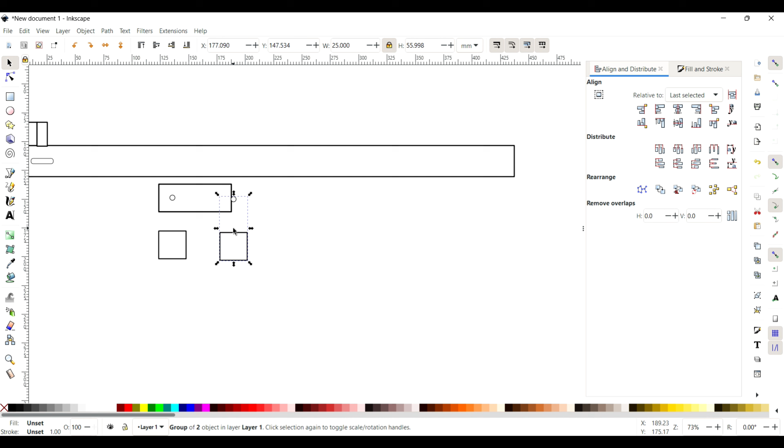And then I'll just copy both of those, Control C, and Control V to paste it back in, and align it to the right hand side there. Now that I've done that, I can just delete those two squares because I don't need them anymore.

So now I've got to centre align these, nice and easy again. You just select all three items and then press the centre align button.

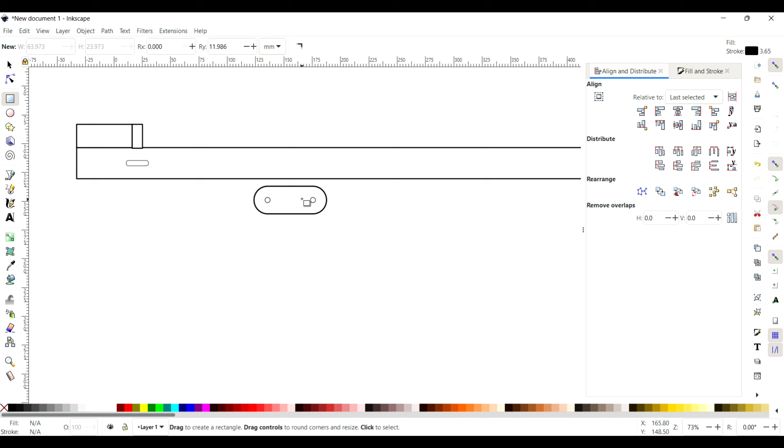Now here's where I can curve this one in, just like that, and then that'll eventually get stitched on top of the main belt of the collar, or the main collar.

So now I'm making another guide box, and this is just to allow for the width of the D-ring in the middle there. This is where I decided I was going to put two rivets on each side of this bit, just so it's nice and secure.

You don't want this popping off and your dog escaping and chasing some wee granny down the road. So I'm just eyeballing everything here. I know rough sizes of how big my rivets are, so I'm basically doing it by eye.

So having spent that time sorting them out, I actually realised that I didn't correct the size of the holes for the pop rivets, so I'm going to do that on this one. I believe that they're 3mm, and that's what I changed it to, just here, using that box up the top.

And then you have to ungroup them, and I move them apart, separating them, spacing them out so they look decent, and allowing for the head of the rivet so it's got space either side, not to interfere with the D-ring that's going to be underneath that.

So now that I'm happy with that, I'll just copy those two and paste them onto the other side, and then centre align everything and make sure everything looks brilliant. So I'll tweak finally, and then we can get that pasted across. So that's that bit roughly done.

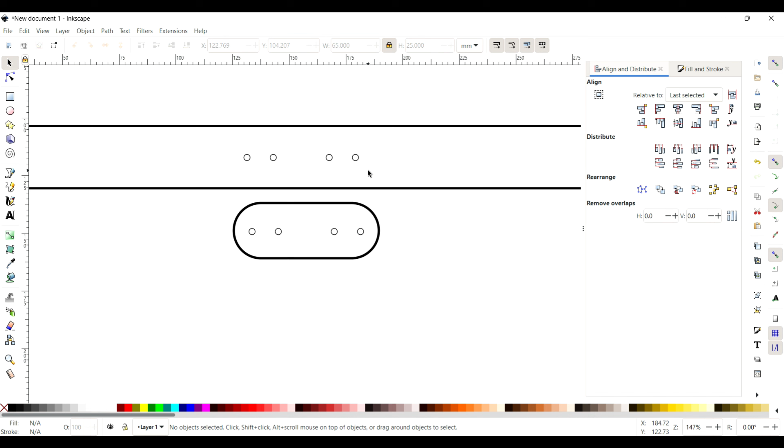So we're selecting this now and then just dragging it up, positioning it roughly where it'll go, and then copying it and pasting it below, and then getting rid of the border, because all we need on the actual belt itself is the holes, so we can line it up later in the job.

So now I've drawn another few boxes there, and what I'm doing is I'm just copying the same holes from before, making more rivet holes for either side of that buckle. I'm wanting 4 here, so I'm just again copy and pasting. It's a way forward, it saves you having to redraw everything, and then using your align tools, it's so handy.

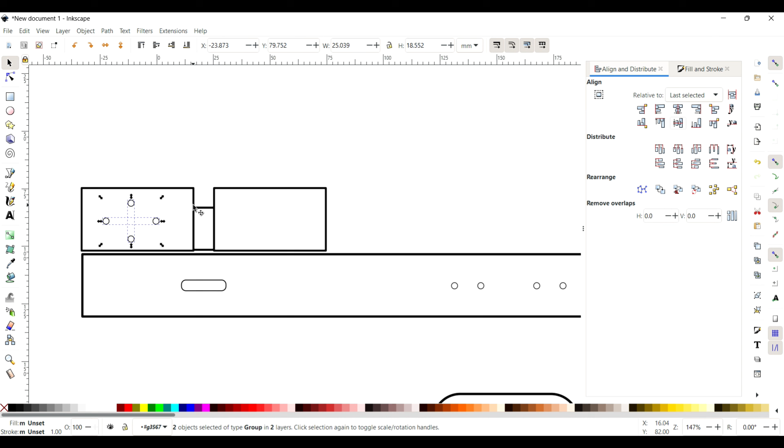So you'll see me doing a lot of tweaking here. I do a lot off the top of my head, so nothing is measured massively, roughly. I measure stuff and then I just play around in the actual app itself, or Inkscape should I say.

So what I've done is I've drawn a box 10mm wide there, just to help with aligning those 4 rivet holes, and then what I'll do is I'll copy it all once I've aligned it all.

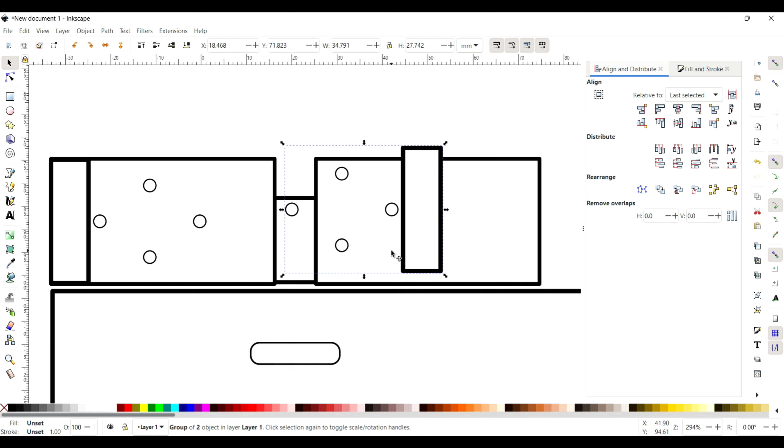Now that I've copied it, I can just go ahead and paste it onto the other side. You can see it went behind the object there, so I just press page up and that brings it up to the front of the layer. And then again, it's just a case of using those align tools to your advantage and lining everything up.

So again, I can get rid of those guide squares, group both of those sets of rivet holes and align them off the centre of the hole for the buckle there, and then delete those guides because we don't need them anymore.

Now we can work on getting some buckle holes for the, I don't know what you call it, the little prong that goes through the buckle.

So for this, what I'm going to do is draw a series of straight lines, just so that it's easier for me to measure to the precise point I know for the dog it was designed for, where it needs to be, basically the hole they use in their current leash collar.

So that line that I've just drawn horizontally needs to be 33 centimeters, or 330mm, and then I can just left align them to that other line that I've lined up with the centre of the buckle hole.

So now that I've got that in place, I can start drawing out my holes for the prong on that buckle, like a normal sort of collar belt would be.

So again, I'm just drawing a rough circle and then resizing it down to 4mm, which will be perfectly big enough for the prong, and then I can right align it to the end of that line, and that's roughly in the position where it needs to be.

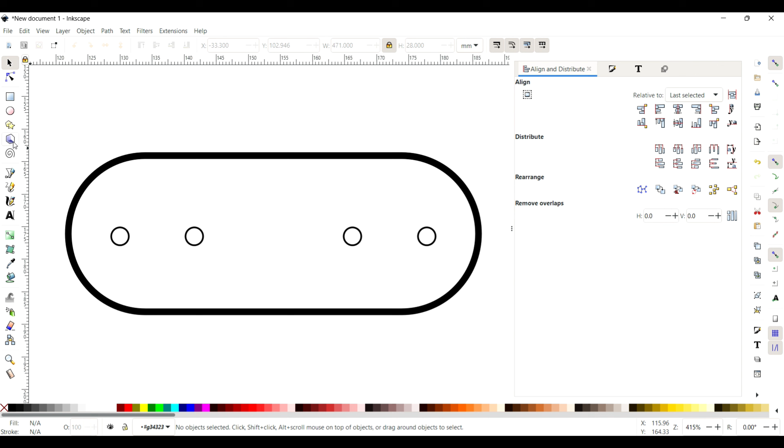I chose to personalise this with a nice big name. I played around with different options, but this is probably the best bit. Again, you just go do what you feel, basically. This is all just an experiment to see how good the laser does with leather.

So now what I'm going to do is add stitching holes, because I thought, as well as the rivets, we should add some stitching holes. It's quite easily done, and there's tools within Inkscape to make it easier. Originally I was going to do circle holes, but I decided to go against that.

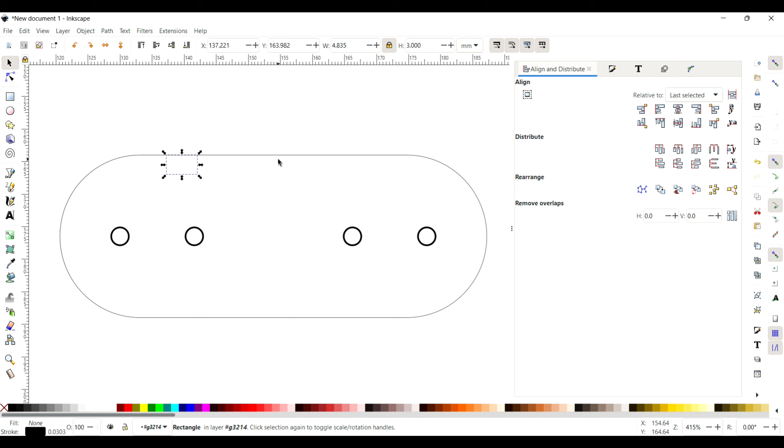So what I'm doing just now is creating another guide box which is going to be 3mm high, because I want to create an offset of 3mm on the inside of that box, and that's the easiest way to do it. You just go to linked offset and drag that line down, and you can see it's 3mm on the inside. Now that I've done that, I can delete the box and convert the inner line, the offset, into a path. So I draw out my wee circle, but later I decide to change it to an oval at a slight angle.

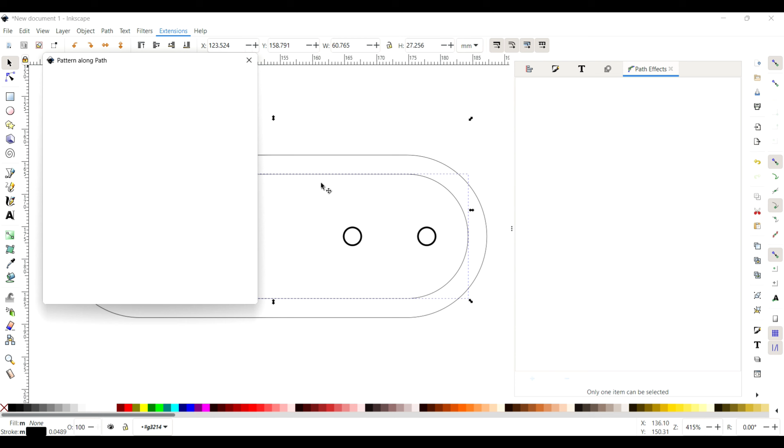There's the oval now, and then we can go to extensions, generate from path, and then pattern along path. It's quite a handy wee tool, there's loads you can do, but I just need its basic features, which I forgot to turn on initially. The pattern isn't vertical, that's why it doesn't look quite right, but then I go through the settings, changing the width of the stitch down to like 3mm, and eventually click that pattern is vertical, and we get what you can see here.

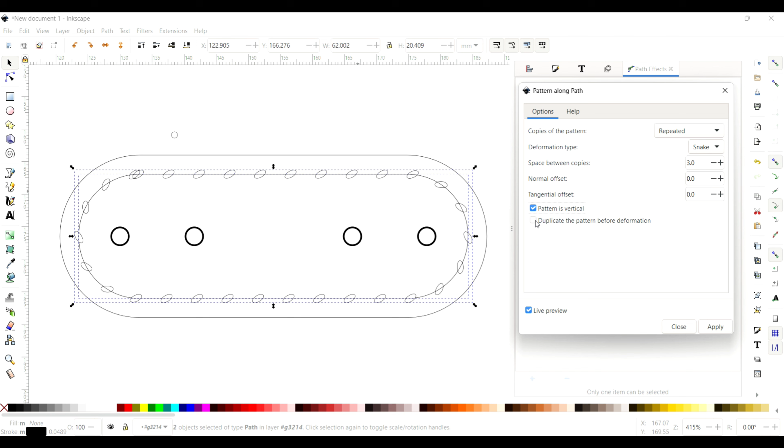Yes, I've got an overlapped one, but that's fine. Once you've played about in this box, you can just hit apply, as long as you're happy with how it looks. I'm fairly happy, I know I can edit that little oval, so we'll hit apply, and then we need to select them, ungroup, select one of them, delete it, and move that one across just a fraction so it evens out that last stitch there.

Now that we've done that, I want to put vertical stitches either side of where the D-ring will sit. So I'm just copying 4 of the ovals so they're the same gap and same distance. Then we'll delete the middle 2, top and bottom, just by drawing a box round and hitting delete on the keyboard. So now we select the 4 again, group them, rotate them and flip them so that eyelets are pointing in the same direction as everything else, and roughly place that in place.

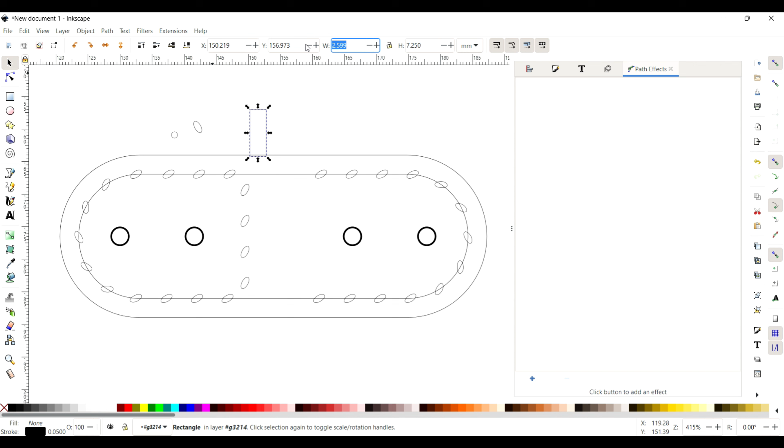I've spent far too long trying to get it bang on, and then decided to draw another guide box at 7mm wide, I believe. Yep, I drew it at 7mm. See, I'm doing this off memory, and my memory is shocking, so I'm actually nailing it here.

I always get a wee bit confused with the next tool that I'm going to use, but we'll figure that out. So I'm just copying and pasting another setting, and for this one I'm using those little corner reference points. Again, I always confuse which one I need to press, but I'll get there eventually. Then you see it will snap across onto the other side, and again it's just a case of selecting that and the outer ring, and hitting that middle align button.

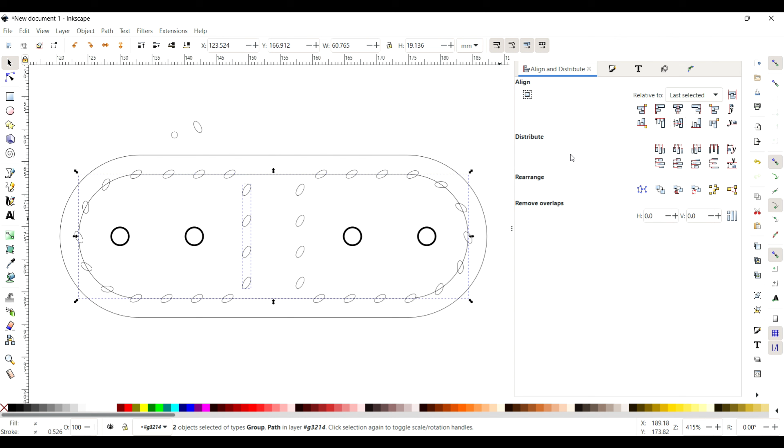With this one, a wee bit easier. I remembered which one to get, and again just center it all up, delete that middle box because we don't need that anymore. So now that I've done that, I can just go ahead and align everything and get rid of that line because we don't need it anymore.

That's just a guide for our stitch holes. Then I'll select it all and place it on, so now that's all done you can see the general feel of the whole thing. To make it easier in Lightburn, I'm going to separate the engraving job from the cutting job, which makes selecting in Lightburn so much easier.

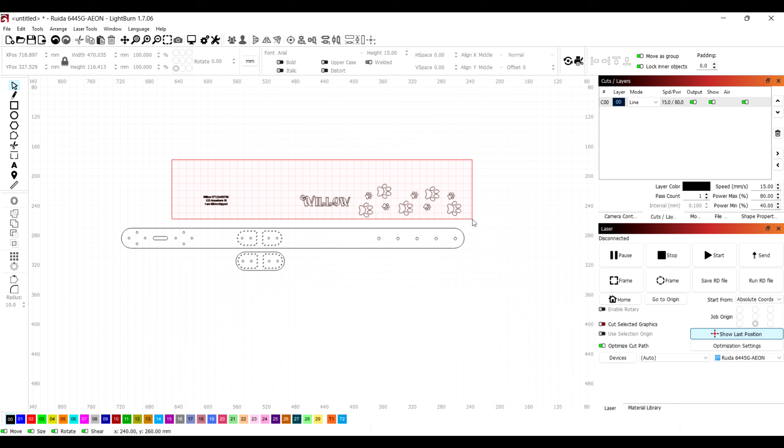Now it's just a case of copying and pasting it all over into Lightburn, like you can see here. The settings for how I engrave and cut will come up when I'm filming that section, which is very soon. So to save a little time, here's a wee tip for everybody.

If you've got a big gap like I have between the address and the paw prints and stuff, you can change it to different colours and keep the same settings, but it means it runs at a different time. So here I'm changing the address to red, I believe. Once I've ungrouped it, just select it again, go down and pick another job. Remember to reorder it though - have your engraving jobs before your cut jobs, otherwise when you cut it the whole thing could move and then it's ruined.

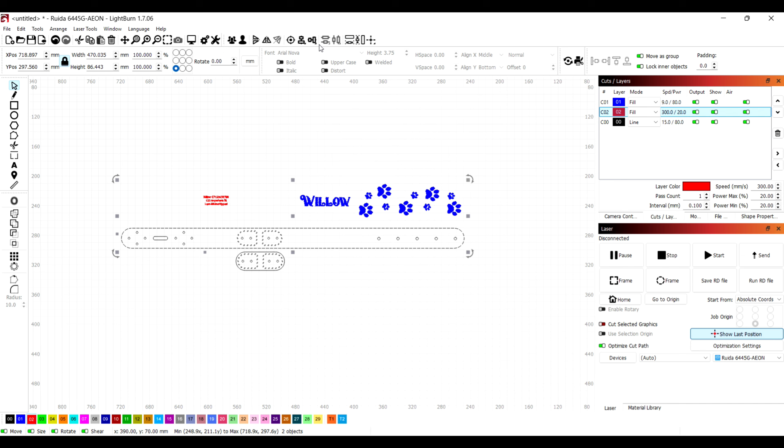Now that I've done that, I can just go ahead and select the outer side of the belt and use the centre align tool within Lightburn.

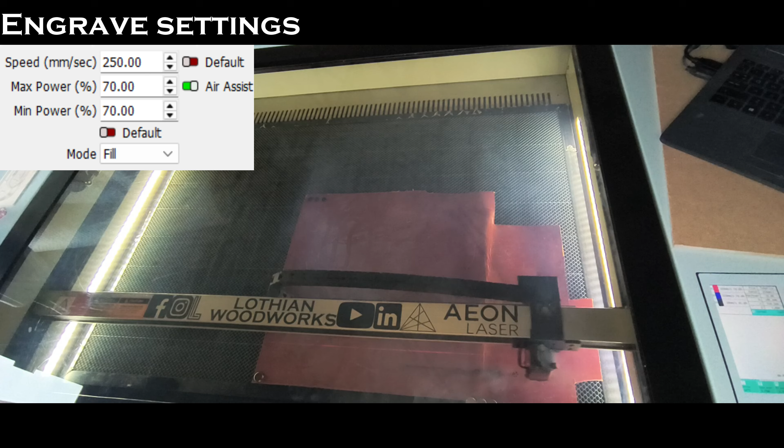So now we're over at the laser, just running it. You can see here I'm engraving at 250 millimeters a second with 70% power, minimum and maximum, with the air assist on.

If you've never done leather before, it's probably important to note that it stinks. It's foul. I really don't like engraving leather or cutting it, to be fair, just how smelly it is. Even with the best filtration system in the world, I genuinely believe you could still smell it.

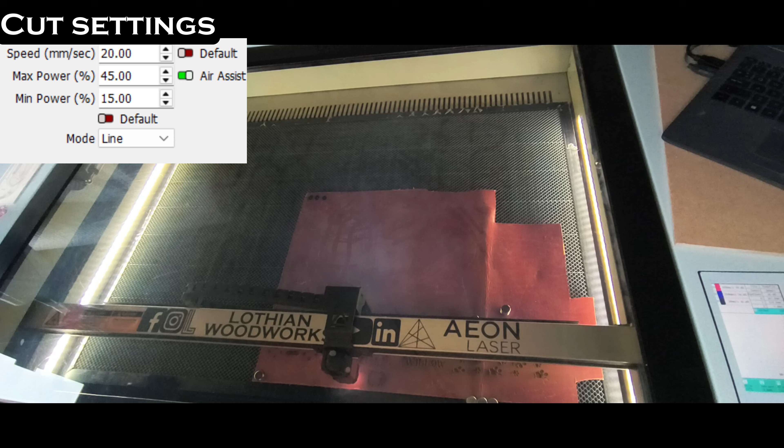So for the cutting settings, I'm doing 20 millimeters a second, because this is 3mm thick leather, at 45% power maximum and 15% power minimum. Again with the air assist on - you can see this is really making short work of the lasering.

I'm really impressed with just how capable this Mira 9S is doing. I've not struggled to find settings for anything really.

Again, it's important to do material tests etc. You can probably notice those 3 little holes up the top there - that was just 3 basic tests I did just to see how it does, and it cut really well.

So we'll get it out, give it a wee clean, and then off camera I'm going to put it together basically. I'm going to rivet it all, then stitch it off camera and bring it back in so you can see it. But it's done a really good job.

The engraving's nice and deep. You can't really see it in this angle, but when I show you once it's built, it looks fantastic in my opinion.